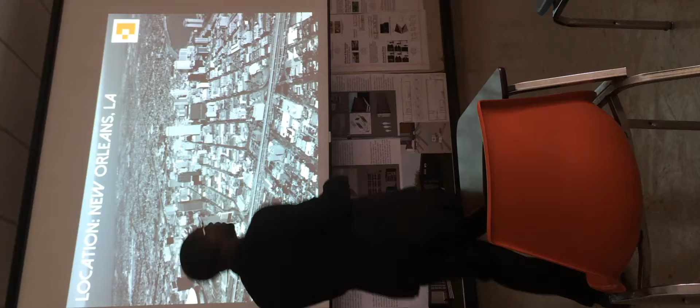The community I'm talking about is my community, New Orleans, Louisiana. Some of you might have been to New Orleans before—if so, you might have been in this area, or maybe you straggled down to the Bourbon Street area. But the area I'm talking about is the Ninth Ward, the area I was born into.

This is early New Orleans, just so you get an idea of how strongly we value our community. The problem I'm addressing can only be solved by full community engagement.

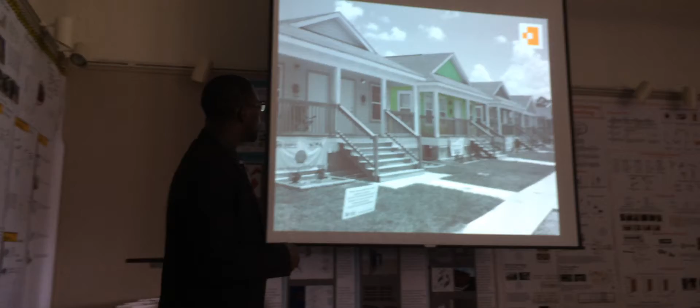So we get an idea of what New Orleans used to look like. This is an area not too far from the Ninth Ward that was rebuilt, and you get a sense of community—we're a big outdoor community city where people participate and engage each other.

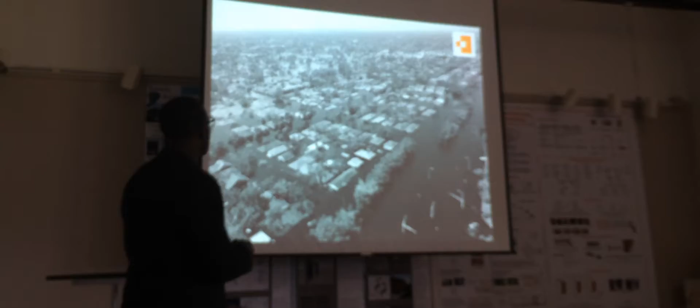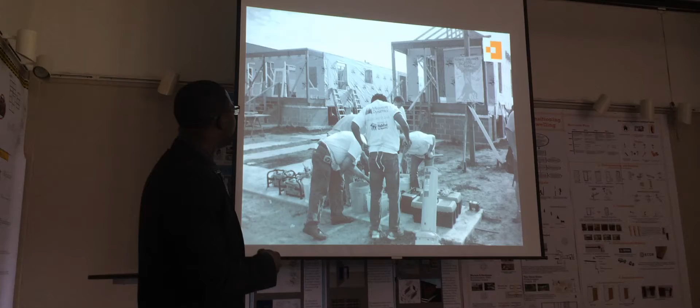We see a little bit more, and then this was the catastrophic storm that happened in 2005, Hurricane Katrina, and we see how this affected the community. But even after that, as time has gone on, we've been able to rebuild and help restore the community.

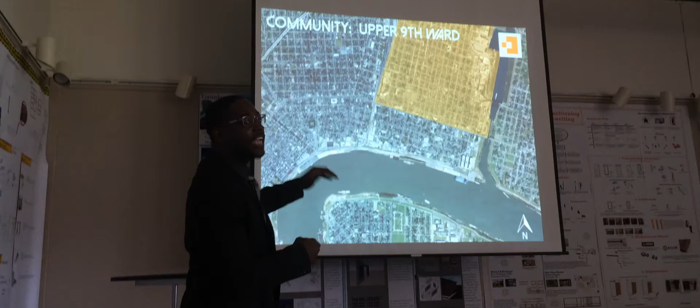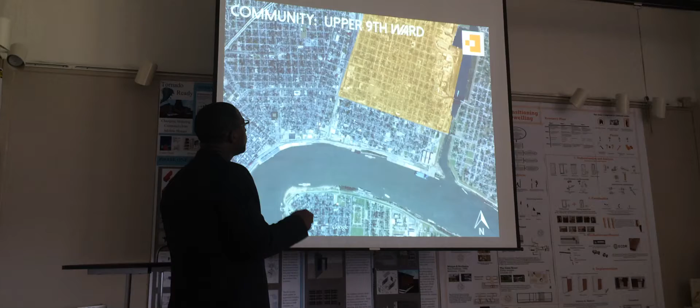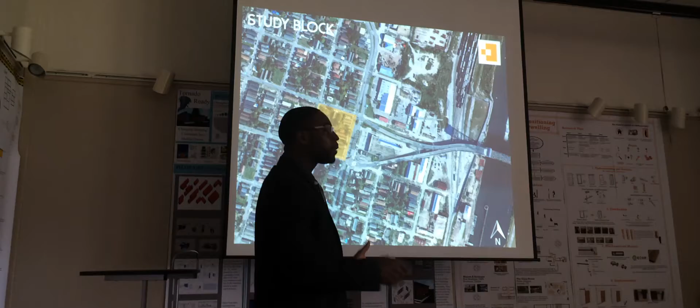This is a particular block I decided to study. I chose this block because it's in the upper Ninth Ward community, which didn't receive as much damage as the lower Ninth Ward did, but it's along this major street, North Claiborne Avenue, which runs through the majority of the city and stretches into the Ninth Ward. I wanted this project in an area that received a lot of traffic, so it would hopefully inspire other parts of the city or people from other places to pick up on these same ideas.

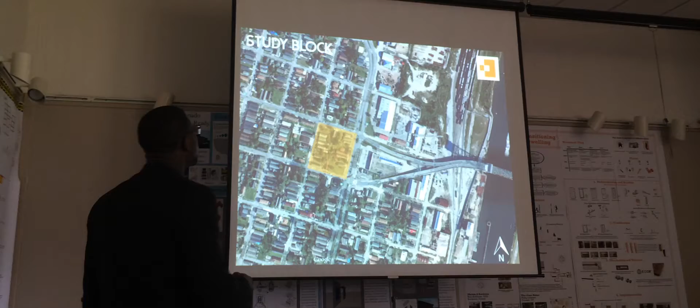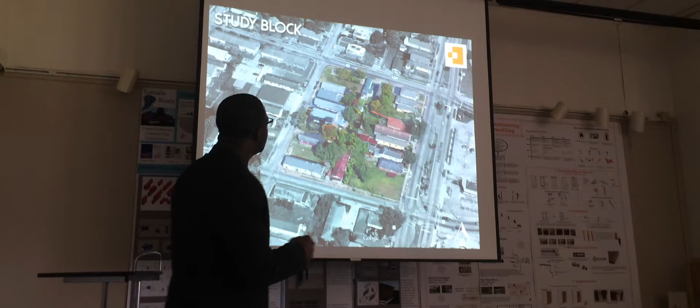This is the major access across the bridge, where you see the canal. Here are some views of the community—as you can see, there are gaps where homes once were. These homes were either destroyed, or weren't taken care of for so long that the city came in and took them down.

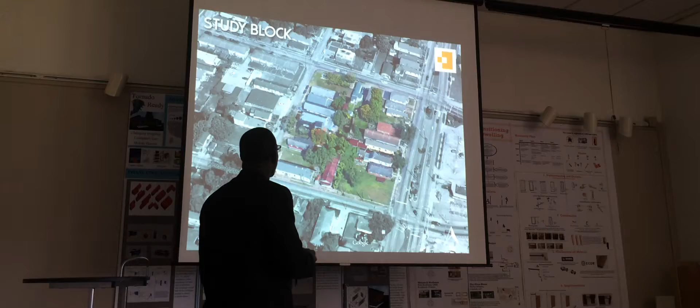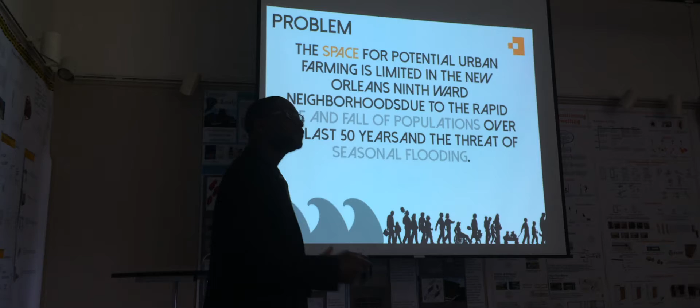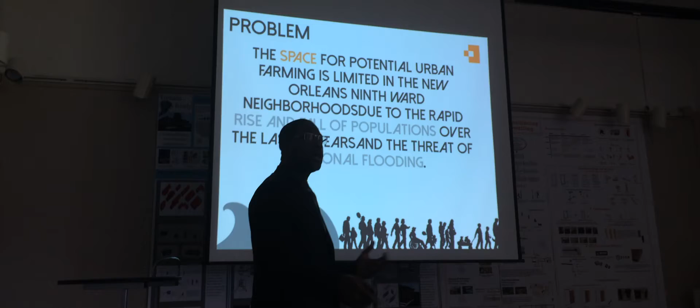The problem I was facing was that spaces for subsistence farming within these communities have become extremely limited due to the rise and fall of population in these areas. The city has had times of large population and built lots of homes for people to live in, and times when people left those homes, which went unattended—which is why we have those gaps we see now.

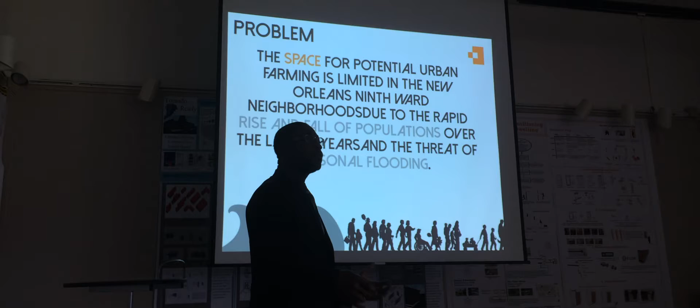Also the seasonal flooding—outside of major storms, throughout the year we have flooding that comes through the city. People who have crops or are growing something will have the flood season come and lose their crops, ruin the land. Then people say, well, next year we won't do that again.

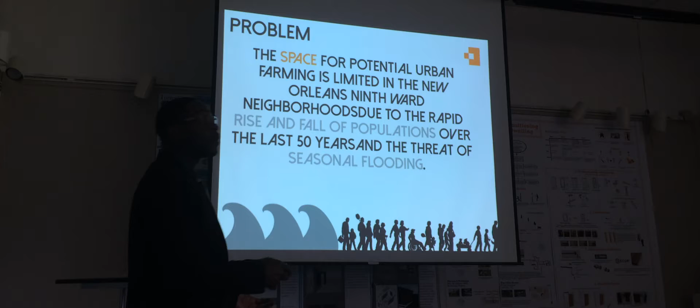Subsistence farming, which I mentioned, is the practice we see sometimes in rural places, where people grow and harvest food and have livestock for their family so they can provide for themselves throughout the year.

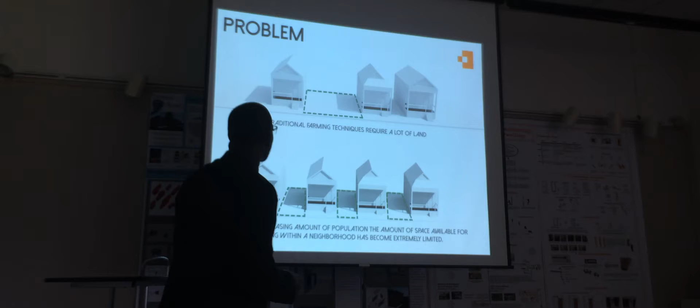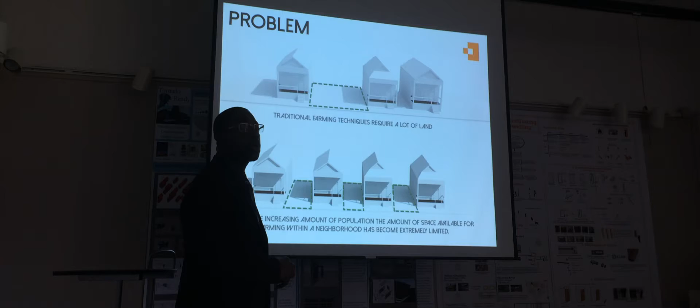We see this will be a traditional space. If anyone's familiar with farming, you know you need a lot of space to make it work properly. If you're lucky in this area, you'll have a space about this big in between your home.

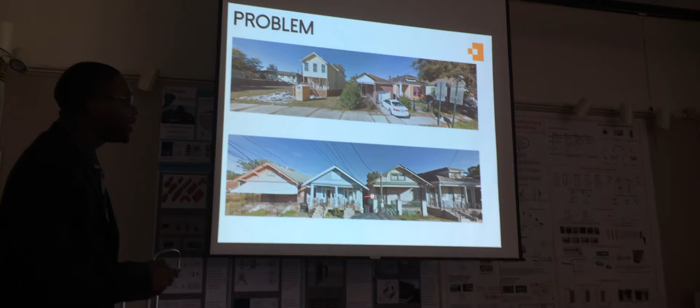This is some pictures of the block I'm working with. You can kind of see this open line right here, and how these homes are stacked right next to each other—we don't have that much space at all in between.

The claim is that there's an architectural solution that can provide subsistence farming and blend it within the urban fabric of that community.

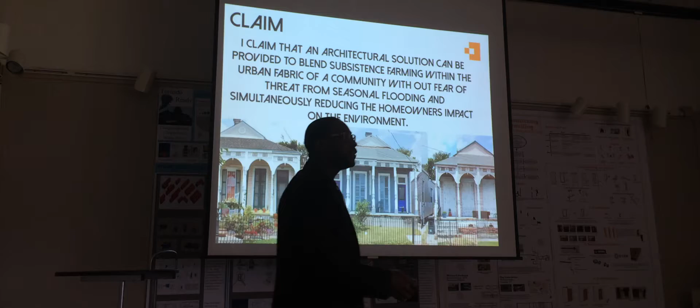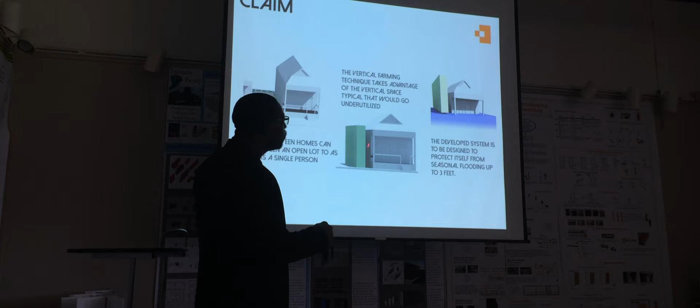I do believe this space holds some value, where we can get this type of system working through vertical farming—a technique that takes advantage of space that typically wouldn't be used. You do have windows, you do have some functions here, but if used correctly, I believe you can get a pretty strong system that will also be able to withstand the threat of a seasonal flood.

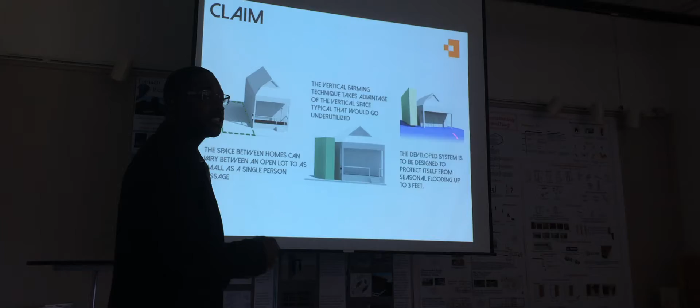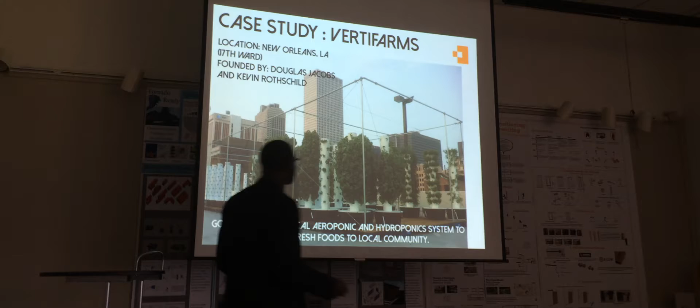These are the case studies I looked at, and from each case study I grasped one strong idea that I want to try to regenerate inside my different solutions. This is a group of people in New Orleans who use the Vertifarm system, and from this group I got an idea of ingenuity.

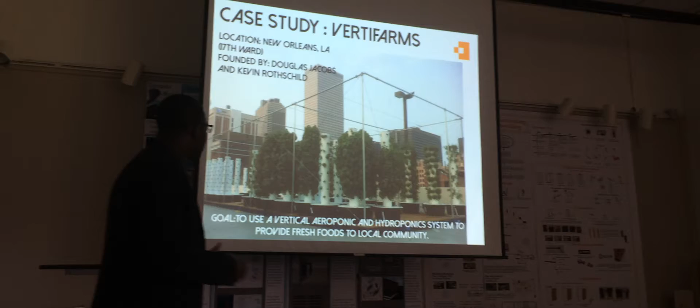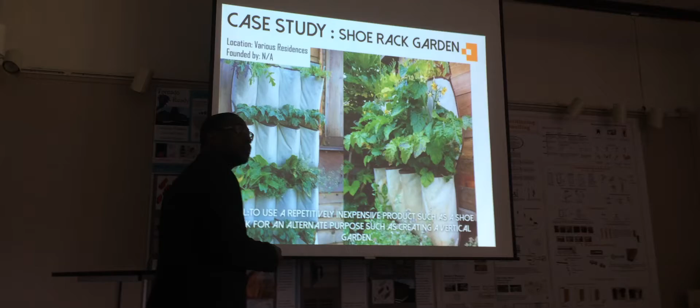This is an aeroponic, hydroponic system that is able to grow flowers and different types of vegetables or other things inside city areas where they don't have that much surface area on the ground. They actually grow those things above some of the grocery stores, and take them right downstairs below.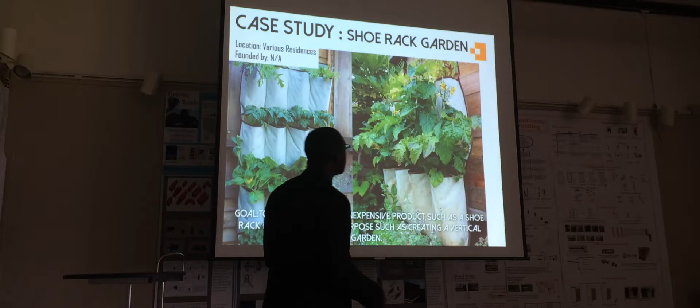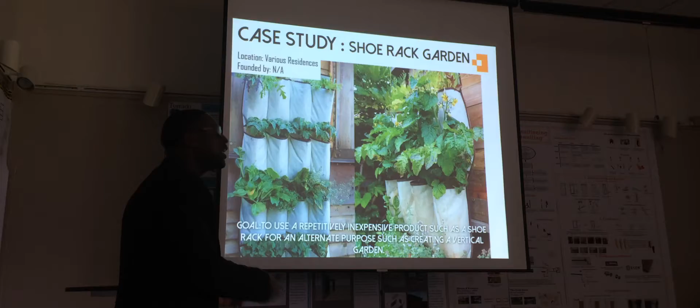This right here is a shoe rack garden, and from this one I grasped the idea of practicality. This is something very popular among the do-it-yourself community, people who simply have shoe racks inside their homes that they decide to put to another use. They grow inside these things, they're able to move them from different areas, and easily harvest from them with very little money input.

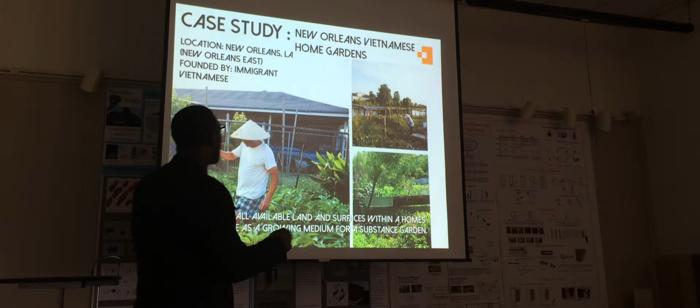This right here, we had a Vietnamese community that came to New Orleans, and these people decided to grow all over the neighborhoods around their homes. They've been able to grow using the front yard, the backyard, all over. And from this, I took creativity.

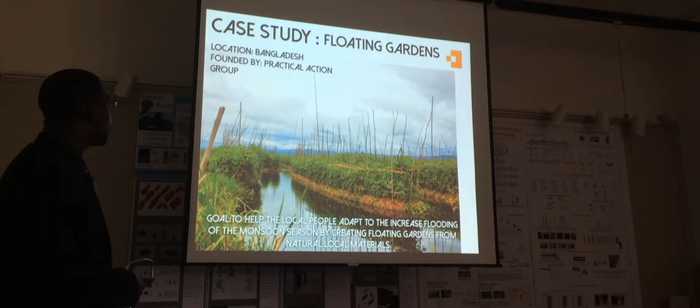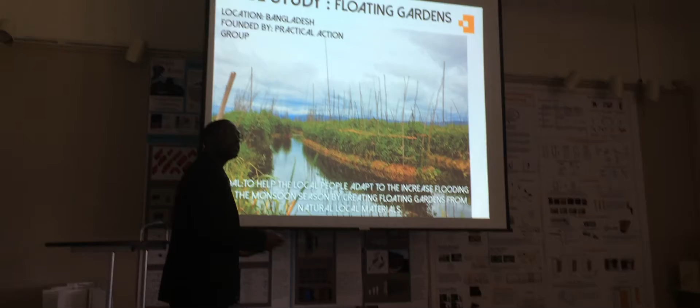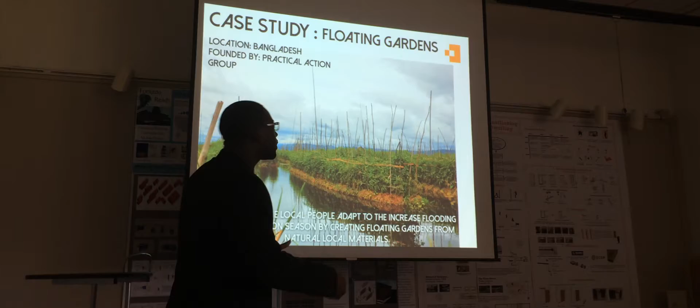This I got from the people in a Practical Action group, which goes and tries to help out places that have been severely hit through different issues. In Bangladesh, they get a lot of their food from growing it themselves, and they've had to deal with a lot of flooding. What they've been able to do is create this system from natural resources inside the community that will actually float and flow throughout the flooding season. What I got from this case study was adaptability—being able to adapt to the environment around you using the resources around you.

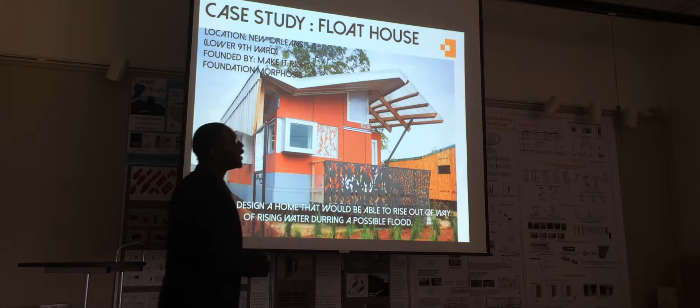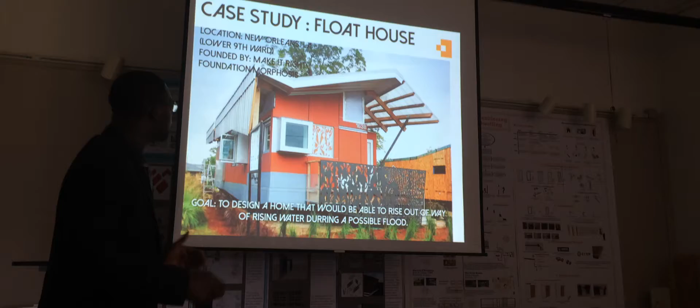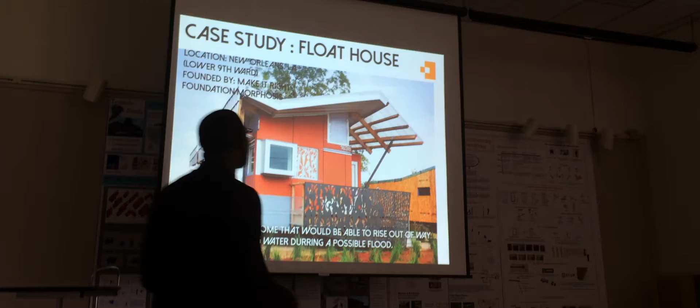The next group, not far from where I'm using my study block, put together the Float House, which is inside the Lower Ninth Ward. This was a house designed with the Brad Pitt Make It Right Foundation, a group of architects who teamed together to put affordable homes in the area. What I took from this case study was the idea of action—taking the next step forward, seeing how you'd be able to actively embrace the changes that were coming ahead.

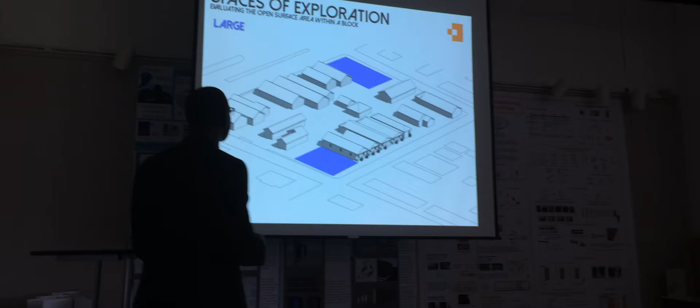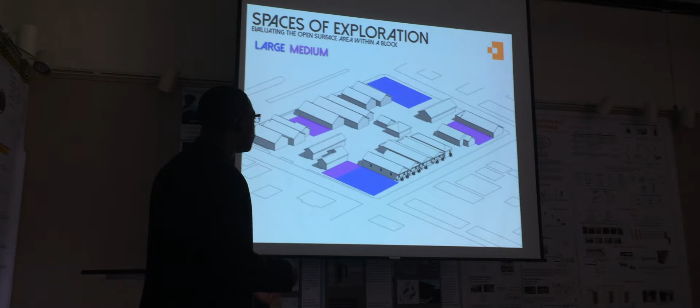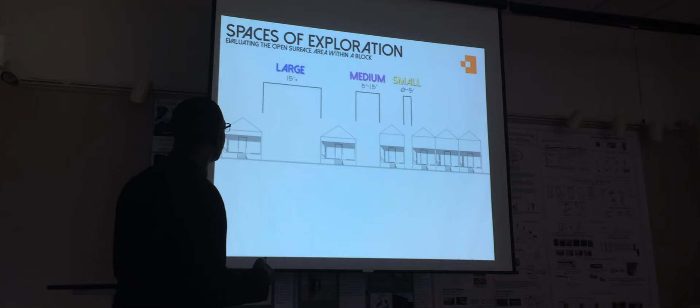As we begin to look at the block, this is the block that I have, and we begin to look at the spaces that I have availability for inside this block. I have large spaces where I once had homes and they're now open lots. I have medium spaces, those spaces that were in between homes—maybe parking spaces, a small field on the side of a home, or a space with a shed. Then I have small spaces, even smaller spaces where you don't have much space at all. These are the three spaces I begin to look at, so I can have a limit of boundaries to work within.

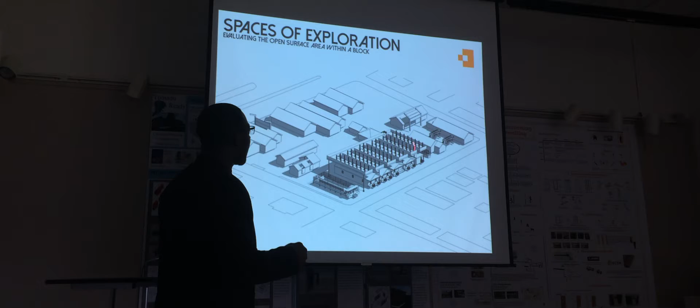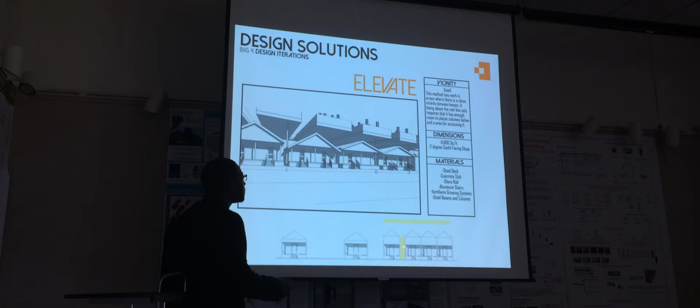And then these are the different ideas I was able to come up with. I had a lot of them, but I narrowed it down to my big four. First, Elevate. Elevate takes use of space where you don't have that much space at all. This is one of the systems I had in place where you have a small space, essentially a platform that will go above and allow plants to form above the roof lines of the homes.

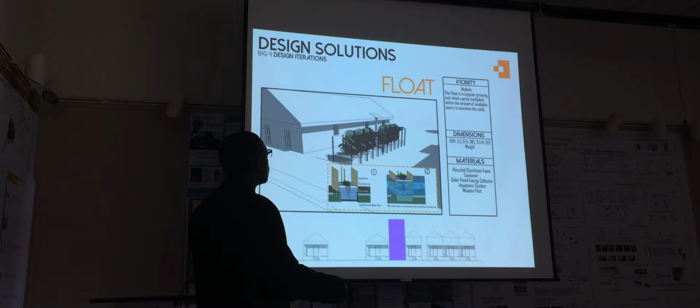Next, I have Float. I took Float from the people in Bangladesh, using some of the natural resources around New Orleans, such as bamboo sticks, to create a guided post where you'd be able to have a garden that would float on something such as styrofoam. So when the threat of flood came, it would simply float and ride within those posts, and when the flood went away, it would sink right back down to the ground plane.

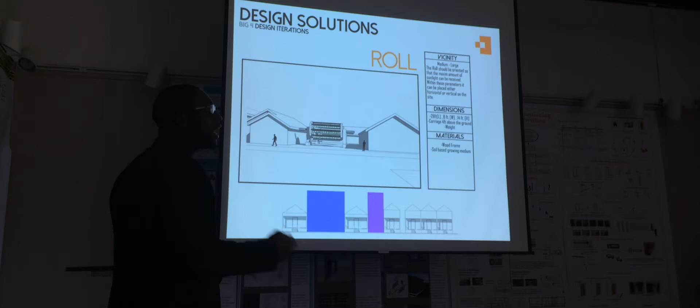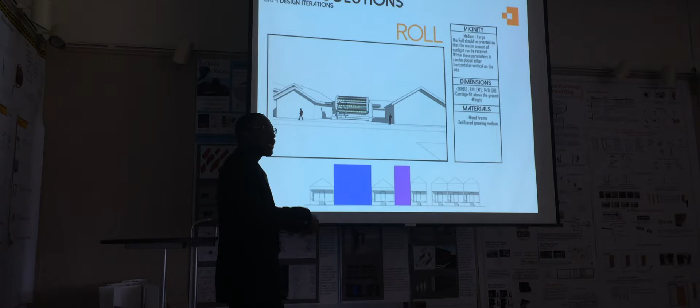And then I have Roll, which works similar to a Ferris wheel, but takes the thought of using that vertical element, that space in between, where you'd be able to grow things that would sit on a carriage, and roll them as needed to harvest from them or move them so certain ones would get more sunlight.

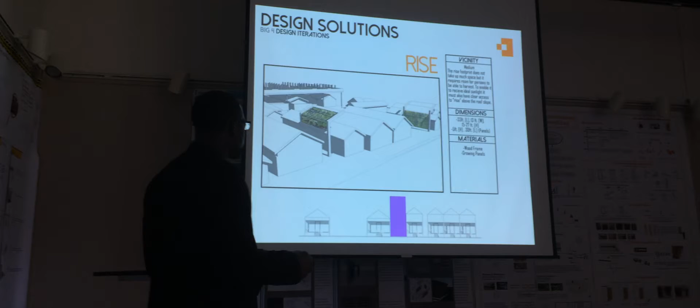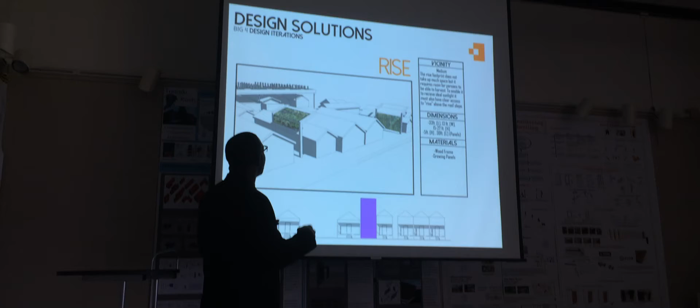And lastly, Rise. Rise was the one I decided to stick with the most and further develop, because it felt like the one that took action. It works similar to how a rise door would work, able to rise and extend over the roof structure of the home. This would allow people to harvest from it when it was down, or just have it down and collect sunlight. If sunlight was low in a certain part of the year, they'd be able to raise it above the home to gather more sunlight. Or if there was a threat of flood coming soon, you'd be able to raise the structure and come back to it later. This worked within that medium space.

So after looking at Rise, I decided to take Rise another step forward. I want to see how I would be able to achieve what I claim within my claim—how we'll be able to combine Rise within the building envelope of the home and the community.